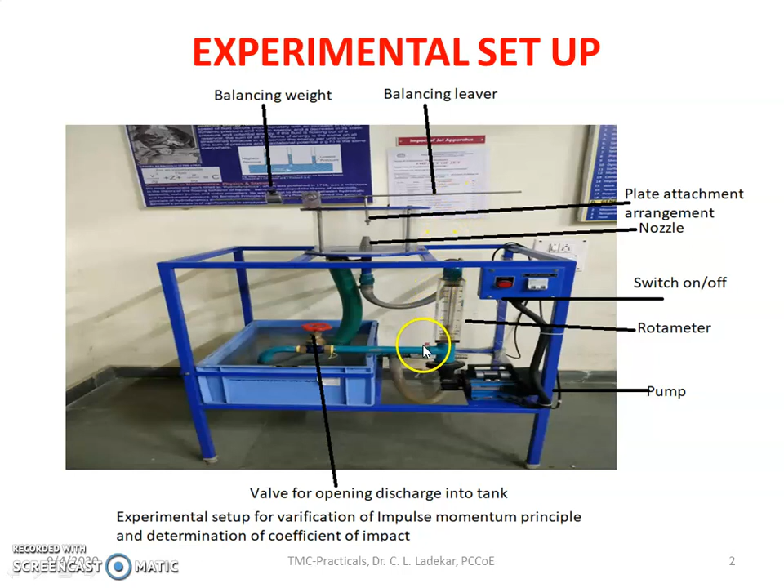Here you can see one lever on which the balance weight is used, so that at the time of performing the experiment you will be balancing this lever, and then you can see the deflection due to action of the jet. In detail of this setup, here you can see the lever which is attached to the fulcrum or the fixed position, and about which this will be deflected.

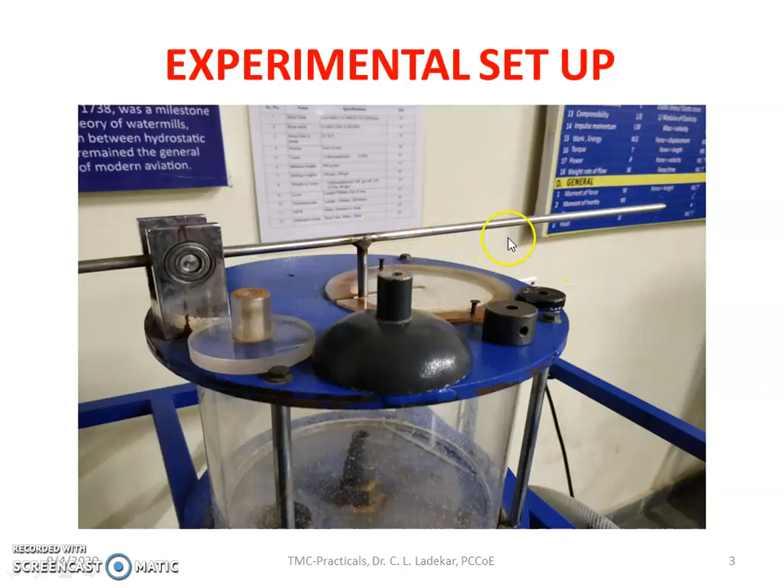These are the two plates, flat plate, this is the hemispherical plate, and these are the two weights which you will be using for performing the experiment, and you will be putting them inside this and varying the distance from this point. You can see the photos of flat plate, and this is a curved plate. The curvature and the angle of this curved plate is given in the specification, which is 68.

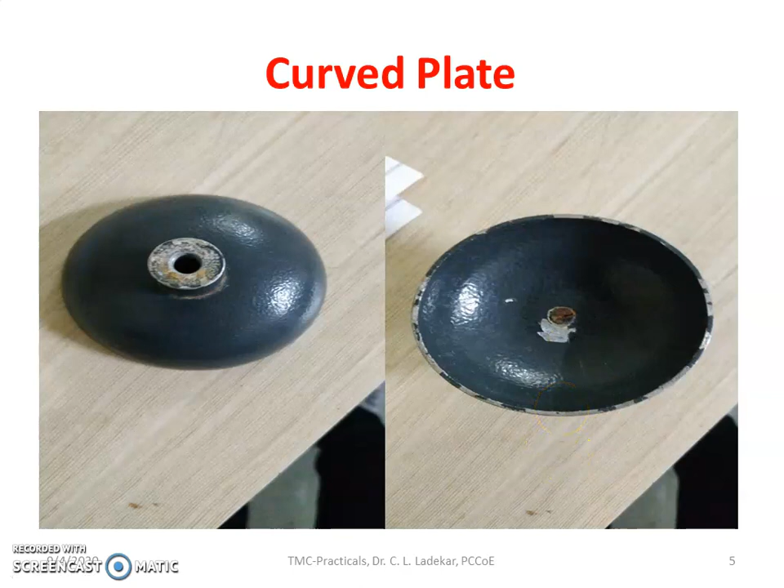Working principle: in this, the jet of water is allowed to strike on the stationary or the curved plane, and the actual force which will be exerted by the jet you can measure by using the lever and sliding weight, and the theoretical force which will be exerted can be calculated on the basis of the area of the nozzle and the velocity of the jet.

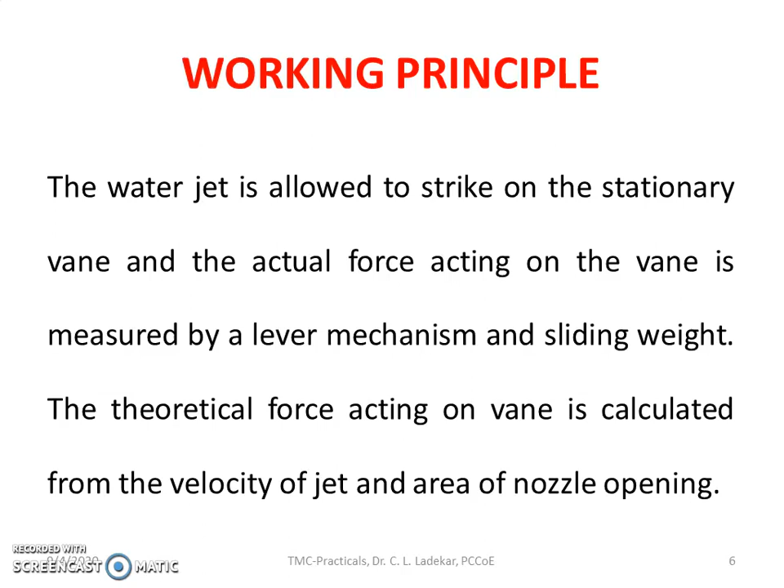Here you will see the procedure for performing the experiment. Before start of the experiment, you have to balance this lever. If the lever is not balanced, you have to balance it by using the balance weight. So before start you have to put the particular plate over here, and then you have to balance the lever.

After that you have to switch on the pump, and after switching on, your water will start passing through this. So here you have the lever by which you can adjust the discharge passing through this. Before actual start of the experiment, you have to see the full discharge through the rotameter.

The rotameter has a range of 0 to 3000 LPH, but in some cases the full discharge will not exceed more than 2600 LPH or maybe 2400 LPH. That depends on the voltage and current of the centrifugal pump. So you have to see the full discharge and divide that in 6 parts. So let's say you have full discharge of 2600, so you can take in the range of 400 LPH. So first observation 400, 800, 1200, 1600, 2000 and 2400, like that. So you can take the 6 different observations.

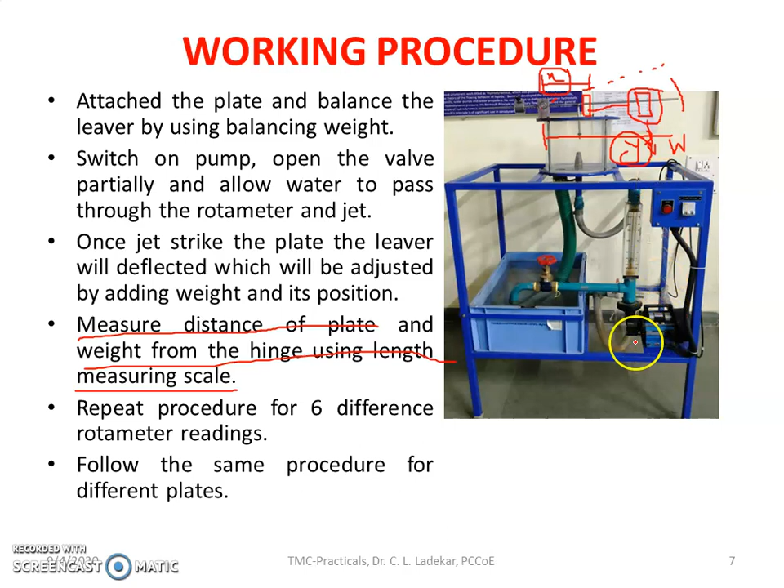You have to repeat the procedure for 6 different rotameter readings. So the way in which you have conducted one observation, similar procedure you have to follow for next observation. Like that, 6 observations you have to note down for 6 different rotameter readings. Once all 6 observations are done for the single plate, you have to replace the plate and you have to repeat the procedure.

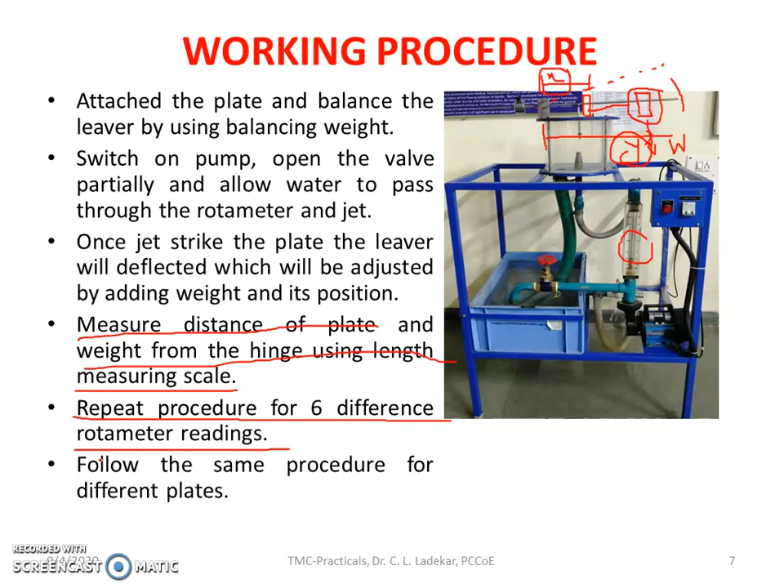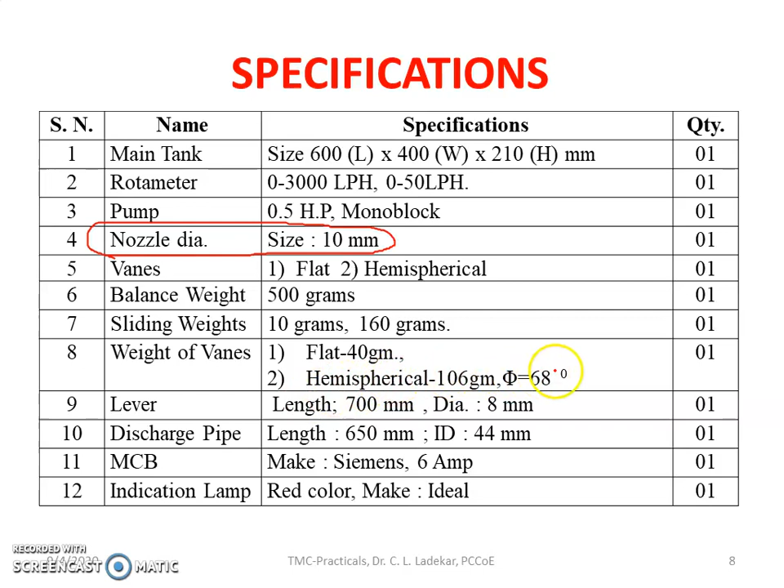These are the specifications. I will not read all the specifications. I will only tell you the important specifications which will be used in the calculation. Nozzle diameter. This is helpful for calculating the area of the nozzle. Sliding weight. These two. The hemispherical disc. The angle of this hemispherical disc is important. Apart from this, these specifications are important. Even this one is also important.

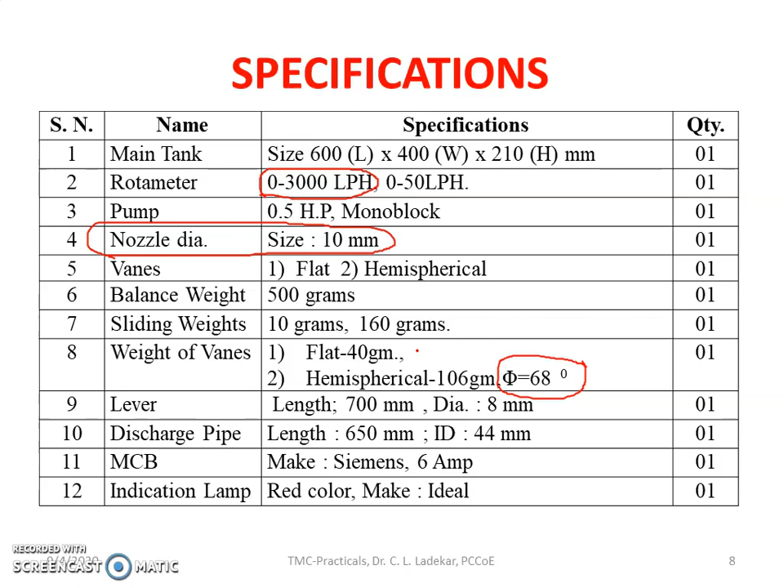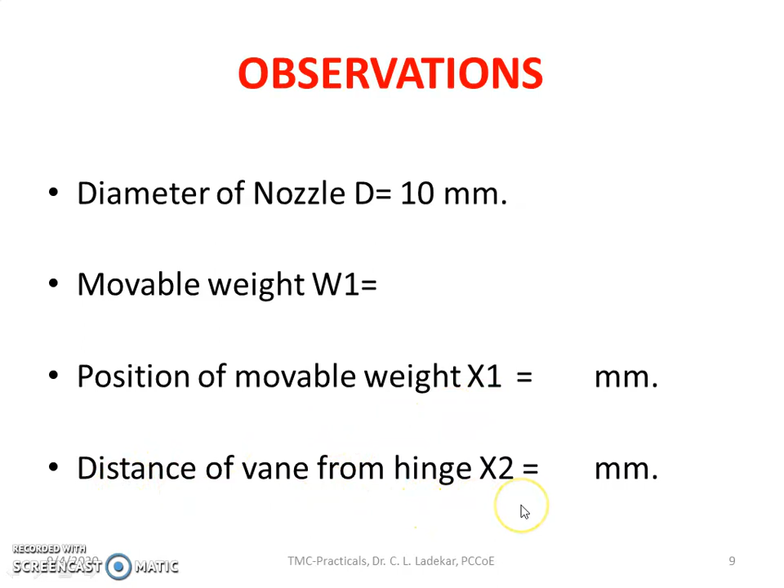These specifications are important, so that whenever you need to replace any part, you can see the specification and ask for the particular specification part. So these are the observations which we will be noting down. Movable weight, position of movable weight x1, distance of vane from the hinge x2, and rotameter.